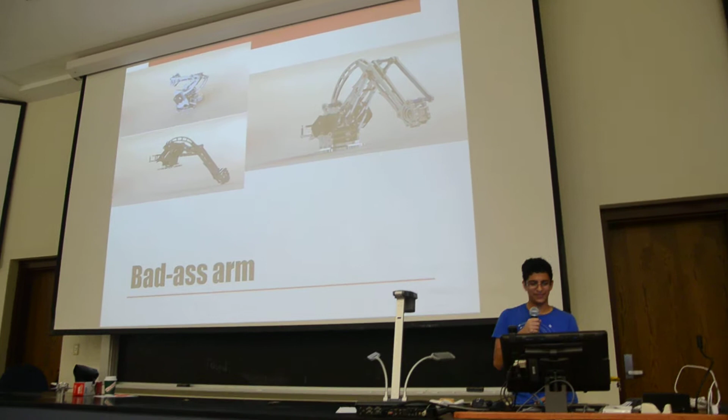So our robot, I'm going to jerk myself off for a little bit. We built this nice ass robot. It has a badass arm. So we based the arm off of the ABB IRB 420. 420. Why is that in a robot arm name? So it's a parallel linkage mechanism.

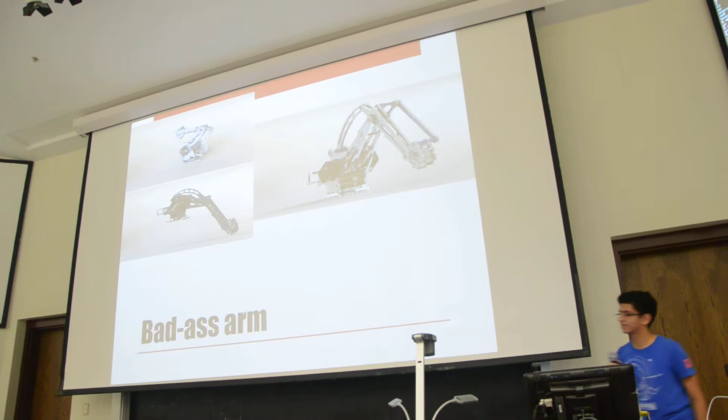If you look in the front, actually I don't think most of you can see that. I'll show you after. Can you put it up here? Don't do that.

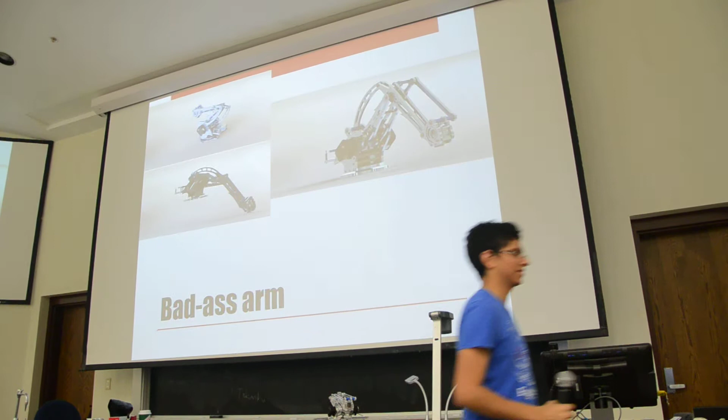This is our robot. There's two servos in the base that rotate the arm. Now, unfortunately, the servos are fried, so I can't show them working, but I'll show you a video. So there's a parallel linkage that forces the end effector of the arm, which is the wrist of the arm, to always be parallel to the ground. Really clever design. Our mechanical lead, Jason, came up with it.

So if you forgive me for one more masturbation reference, I think a great application of this would be coming next. Let's go, no, please.

So we have a full 3D simulation, because building a robot takes a long time, but we want to make the robot work before it's built. Probably before the 70s, wanting to make the robot work before we build it was a stupid idea. It doesn't make any sense.

But now, we have this tool called Gazebo, which is a full three-dimensional simulation of the robot. So we basically imported the SolidWorks model, developed all of the physics, all of the dynamics, all of the constraint mechanics, and now we simulate the whole robot. So you can do everything that this robot can do on your computer, as long as you're running Linux.

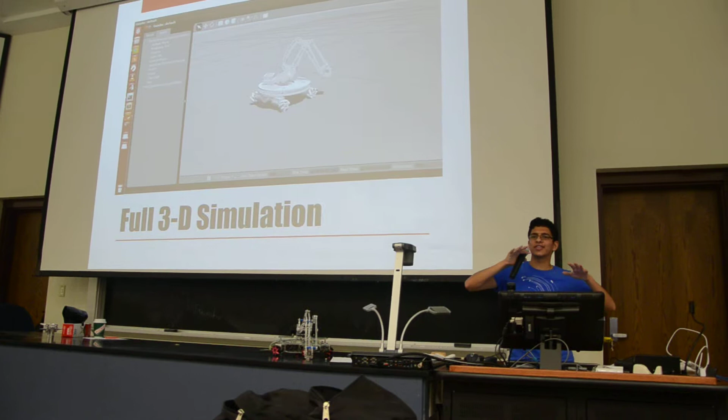Funny story, so one of my friends, if you've heard of the DARPA Robotics Challenge, they do walking robots, very cool thing. He used Gazebo to simulate his robot, and he was in an interview at SpaceX talking to Andrew Howard, who I mentioned before, and he talked about how he used Gazebo, and he was saying that there were some issues with Gazebo. And he said something to the effect of, whoever came up with Gazebo should have been a better architect.

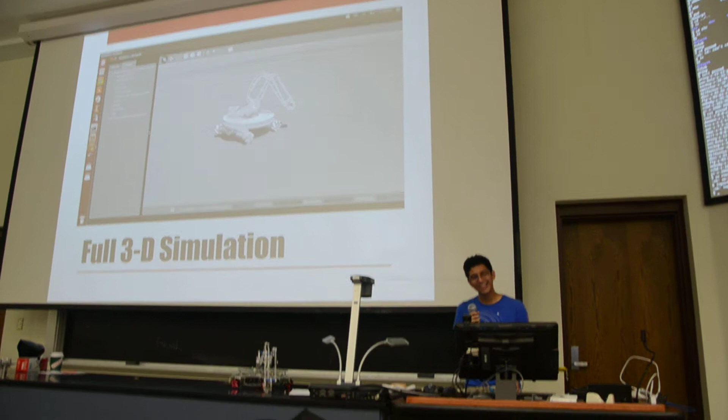And so there's a pause in the conversation, and Andrew says, are you aware that I created Gazebo? And I think it's one of the funniest things that could possibly happen to you in an interview. He got the job, but that's a pretty classic thing.

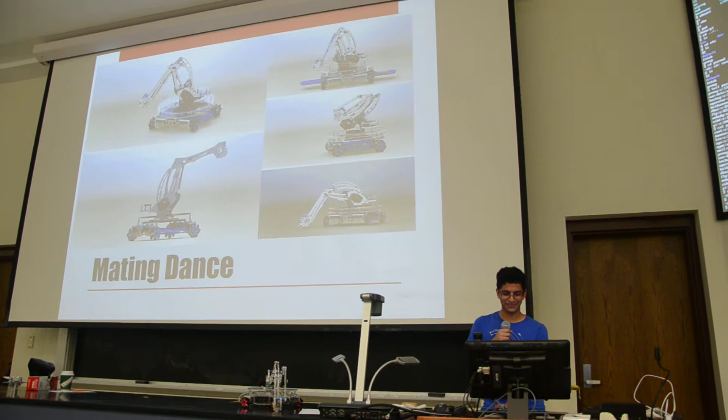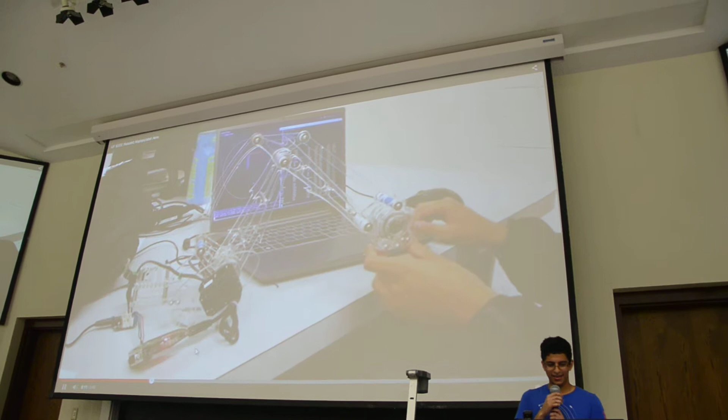So we're using ROS, Robot Operating System, on top of Ubuntu 14.04. So see this cute little super awesome GUI right there in the background for controlling the arm? So I made that in Pygame, and it took like 10 minutes. And on the right side is ls /dev. It doesn't have anything to do with the robot arm, but it looks cool.

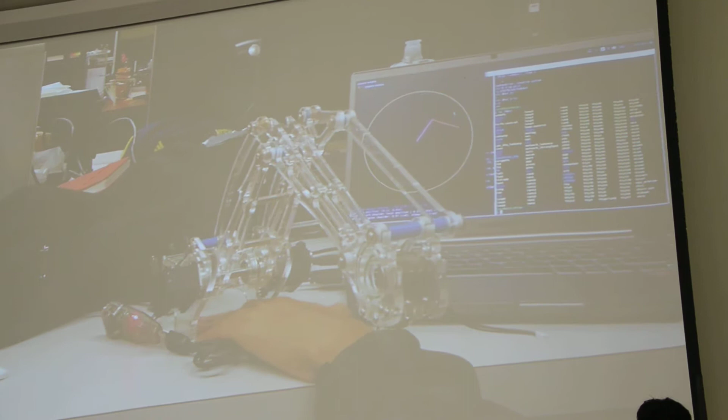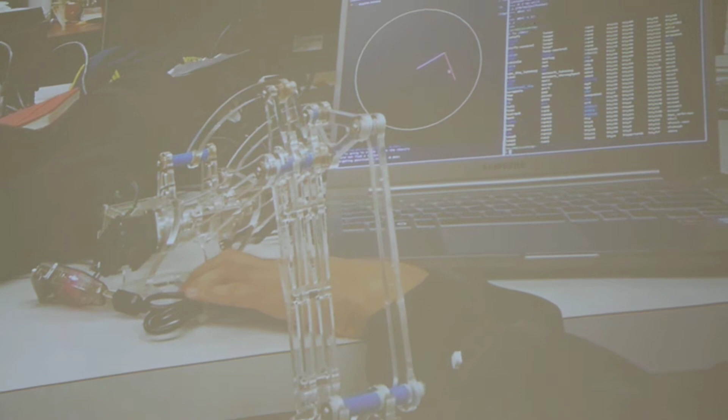So here it is. You click a position. In the actual competition, the robot is determining which position the arm needs to go to. But there is something called an inverse kinematic solver, which figures out the optimal angles to put the servos at, to position the end effector at one location.

Here we go. So how does it know what to do? I'm sure most of you are CS people, so you have some idea, but I want to give you a more firm concept of how it actually knows what to do. So step one is computer vision. I didn't mention this before, but the robot can play chess. It can't play chess right now because the servo's not working,

but it uses computer vision to segment a chessboard and identify pieces. And then there's an artificial intelligence inbuilt on the robot by a man named Josh Sanders, in case you know him. He's a senior, very smart guy. So it takes place in a sequence of steps. It takes a picture of the board, figures out which pieces are where, then passes that information to the AI on the robot. And that AI makes a decision about which piece to move.

That decision is used to control the arm, which grabs a piece, moves it to a different position, and then the cycle repeats. And I want to be clear that there's really not anything else involved there. Well, so there's a lot of low-level sequences. There's power being moved around. There are all kinds of things happening in the operating system.

But the way that we develop robotics is through a method called abstraction, so that people at each layer don't need to understand how things beneath them work. For example, the person developing navigation software doesn't need to understand how the hardware-level drivers on the motors work. And likewise, the person developing the hardware-level drivers on the motors doesn't need to understand how navigation works.

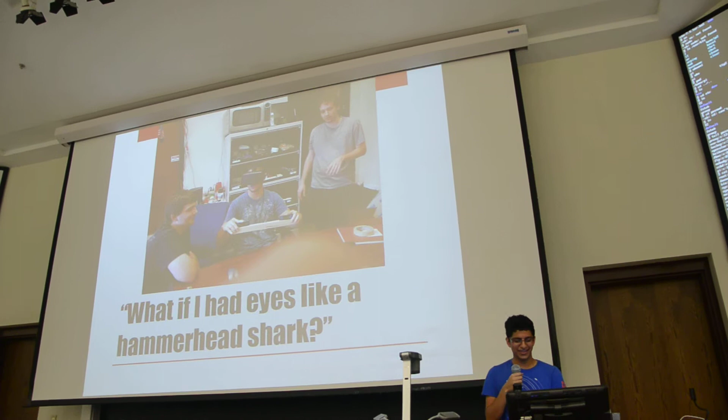This is our project for Lockheed Martin. They gave us $30,000 to plant cameras on the front of the Oculus Rift and then make it work. It turns out that's actually pretty complicated, but I think it's a hilarious project to give a bunch of undergrads. It works right now. In fact, I brought my Oculus Rift, but I was late, so I had to run, and I only brought the robot, not the Rift.

That's the way I think most things are done. Except at different companies, it's phrased a little bit differently. But ultimately, when SpaceX was founded, Elon Musk looked at Tom Mueller and he said, what if we built a reusable rocket? And Tom Mueller said, that's stupid. And then they did it. And in fact, December 16th, SpaceX is landing a rocket on a barge. You should all pay attention to these.

Did you have a question? Yeah, does that robot play basketball? Not yet. Why? I think IEEE made one somewhere. Oh, yes. Have you seen that video? So last year, there was a robot that played something similar to basketball. I can show you a video of that. So I worked on that robot. I did the computer vision for that robot. That was last year's robot. Yeah, I'll show you a video of that. But there was a robot that played basketball.